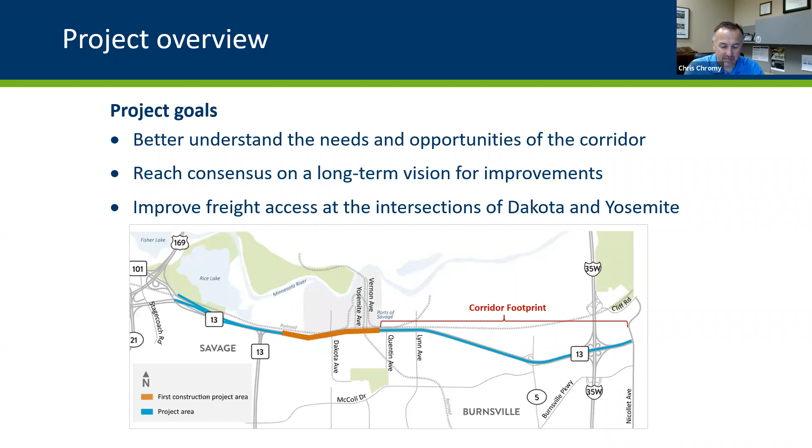I drove through this morning. The train was going through. The trucks were backed out onto Highway 13, as many of us see on a regular basis. So those are the goals of the study: to understand needs, reach a common vision for everyone to rally around, and then get some immediate improvements at the freight access locations.

So a little bit of background, Highway 13 is carrying more traffic than it was ever designed to. 56,000 cars a day go through downtown Savage on Highway 13. A typical 4-lane signalized roadway like that, we would expect to carry 40 to 45, maybe 50,000 cars a day. Through our study, we recognize that there are several intersections along the corridor that have more crashes than what we would expect for the amount of traffic going through there. And I'm sure you've all experienced the sirens you hear going to the crash sites on a fairly regular basis.

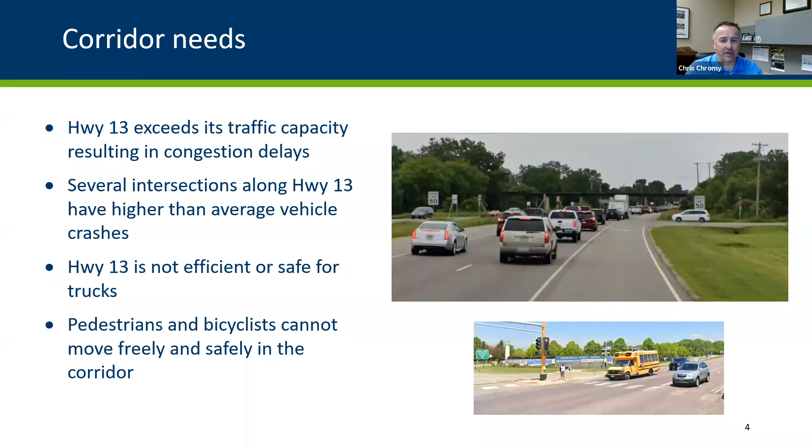We know that Highway 13 is not real efficient or safe for trucks. There's a lot of truck traffic going in and out of the ports, going in and out of waste management. There's a lot of retail and industrial in Savage. So it is certainly a high freight corridor, high large truck corridor. And then pedestrians and bicyclists, we do have a downtown area. There really isn't a connected bike ped facility along the corridor. There's plans for it, but we wanted to incorporate some of that into the vision.

We started the corridor study 2 years ago now, almost to the day, understanding the issues of the corridor. This corridor has been studied a number of times over the last 20 years, and it was our intent that this is going to be the last study. We're going to move projects forward.

We reached a consensus amongst the agencies on what the ultimate vision for Highway 13 looks like. And then we moved into our environmental review process and design for the corridor improvements, and I'll talk in a little bit more detail about that. As we move into the last quarter of 2021, we're now putting together construction documents for our first project that will begin in the spring of 2022 at Dakota Avenue.

That project is the first project out of the chute from the corridor study. There will be a number of projects coming on Highway 13 over the next, I'll say 5 to 15 to 20 years.

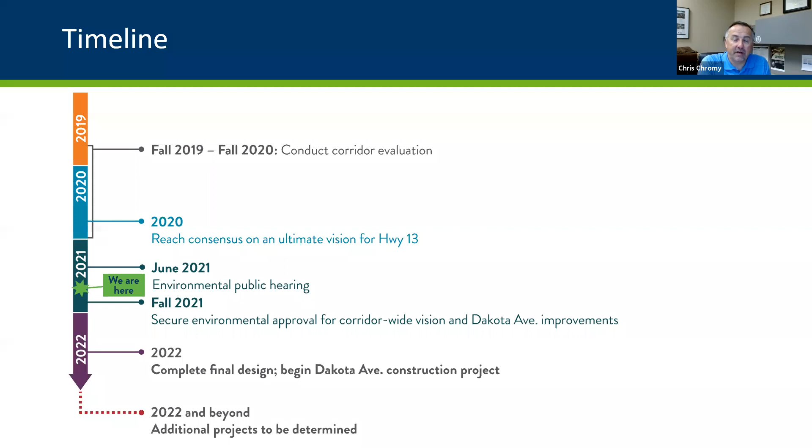So what is the corridor vision? What is the footprint? The corridor vision in my world is really our ability to agree upon where primary and secondary access along the corridor will occur, and then what types of intersection control are at those locations. As we plan corridors, we plan not just for the corridor itself, but how the corridor ties into the local roadway system, sidewalks and trails, and we design it to work as a system.

The footprint is a term that we use in the environmental review process. The footprint is the area which we believe will be disturbed to construct the recommended improvements, and any sensitive areas in there we will need to mitigate for. For this project, we are using a relatively new process with MnDOT and FHWA meant to streamline the environmental review process for future projects.

We used to do environmental reviews for every single project, and there was a lot of duplicate work, and we started at the beginning of the timeline each time. What we did on this corridor is we did an environmental assessment for the whole corridor, for the half dozen or dozen projects that could potentially come out of this corridor study.

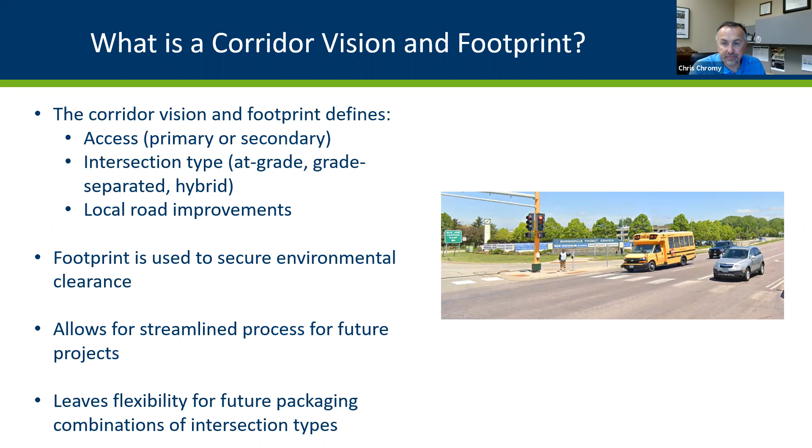So this is what the agreed upon vision for the corridor is, and I'll step through this a little bit. Of course, we have the relatively recent improvements at Highway 13 and 101. That project was built back in the 2011, 2012 timeframe. And then County Road 5; both of those have some grade separation. County Road 5 is a full interchange now.

The other primary intersections that we're going to maintain full access at are at Dakota Avenue, which is right at the ports of Savage; Quentin Avenue, which is on the west end of downtown Savage; Chowen Avenue, which is on the east end of downtown and on the Savage Burnsville border; and then Nicollet Avenue, just east of Highway 35.

We also built some flexibility to provide some secondary access at Lynn Avenue and Washburn Avenue. Both of those locations have traffic signals at them today, so all the movements are occurring there. At Lynn Avenue, because of the tightness of that corridor and some of the alternatives that we're looking at for Chowen and Quentin, we can't maintain full access there. So we're looking at how we build the local roadway system to the primary intersection so that safe and convenient access can still be provided.

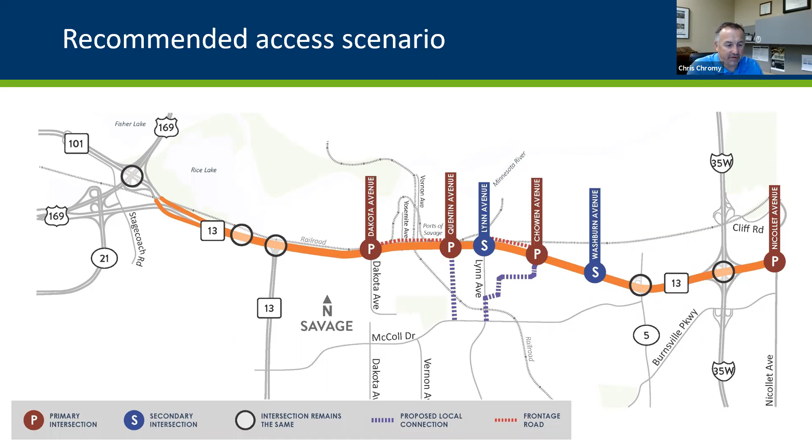So at grade improvements that could occur out here could include higher capacity at grade intersections. What you see here as an at grade, that would be a signalized RCUT. This is where we remove the crossing movement and the left turn out movement, but it creates a much more efficient intersection and we can still get access off of the highway and into businesses and into the local roadway system, and then connect people back to the highway, either through the local roadway system and to the primary intersections or through U-turns on the roadway itself.

A freeway type facility, I think we're all familiar with those. Those are relatively common. That's Interstate 35, it's 212, it's 169 through this area where we have grade separation or bridges to separate the conflicts on the roadway. And then we have a hybrid, which would be a mix of at grade and freeway type solutions, all within the flexibility of that corridor footprint.

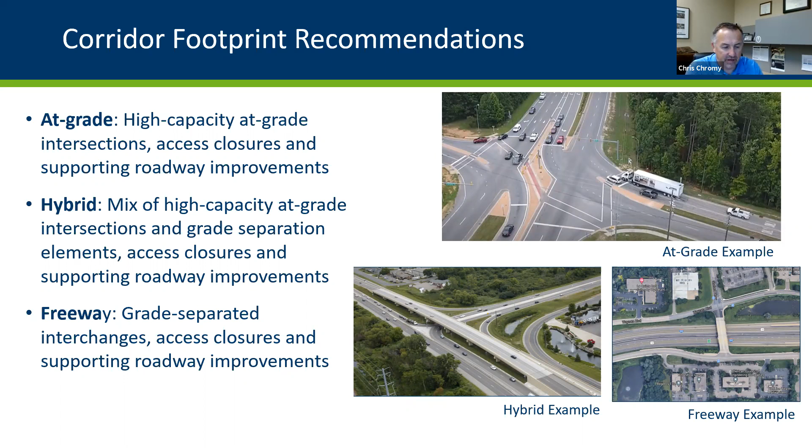So on the corridor concepts, we've had a number of public engagement feedback sessions. Going back all the way, actually, we had some of our initial stuff in February of 2020, just before COVID in person, and then through COVID in 2020, where we did some virtual stuff, and then some hybrid stuff here more recently. But some of the things that we heard from the public, business owners, property owners, those who chose to participate.

Between Quentin Avenue and Washburn, we did hear some support for hybrid options, at grade and grade separated type improvements, largely because it's the challenge of maintaining traffic flow and also providing safe and convenient access in a relatively tight area. There was clear recognition that there's issues with the traffic and safety, the congestion that's a regular thing on Highway 13, and then obvious concerns for loss or change in access to neighborhoods and businesses with the freeway options.

At Nicollet Avenue is a little bit different animal for us. The focus at Nicollet Avenue, what we heard is really the need for improvement for people walking, because this intersection is so important for transit, both MVTA and Metro Transit sites, kitty corner from one another there, and then the heart of the city and some of the dense land uses that are there demand improvements for people walking.

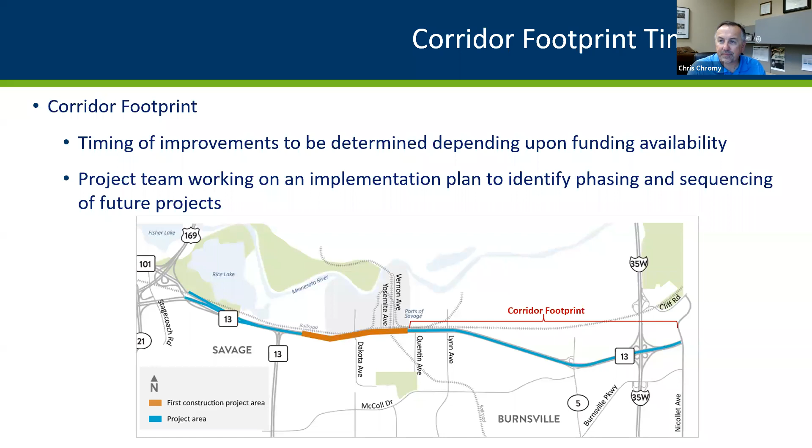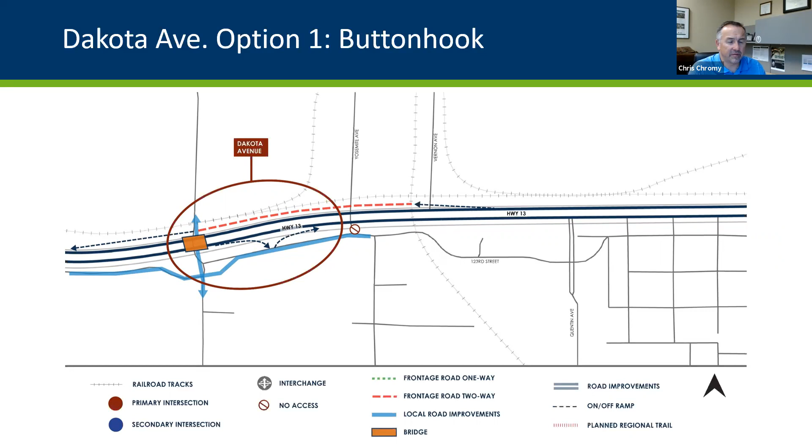So I'll talk a little bit about the Dakota Avenue improvements in Savage, and I'm going to go a little bit quicker here. We looked at and evaluated three viable options. One was this Buttonhook concept that included a bridge over Dakota Avenue, and then some quick on and offs to the frontage road system at that location. We looked at a tight diamond, which again brings Highway 13 up and over Dakota Avenue, so trucks and passenger vehicles would be able to go under Highway 13 between the ports and the area south of Highway 13.

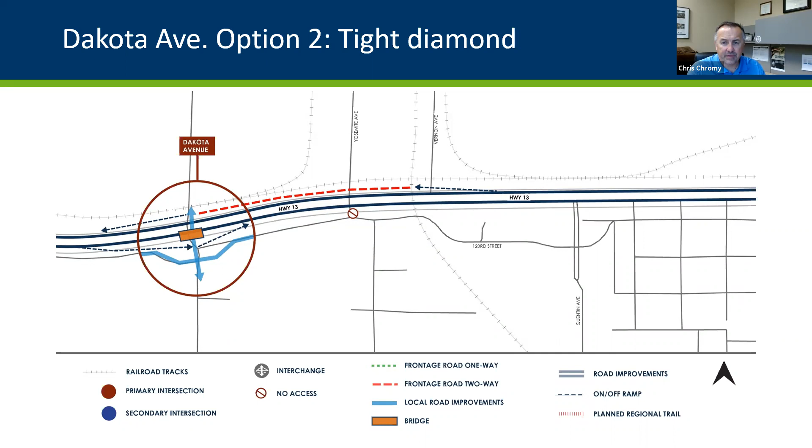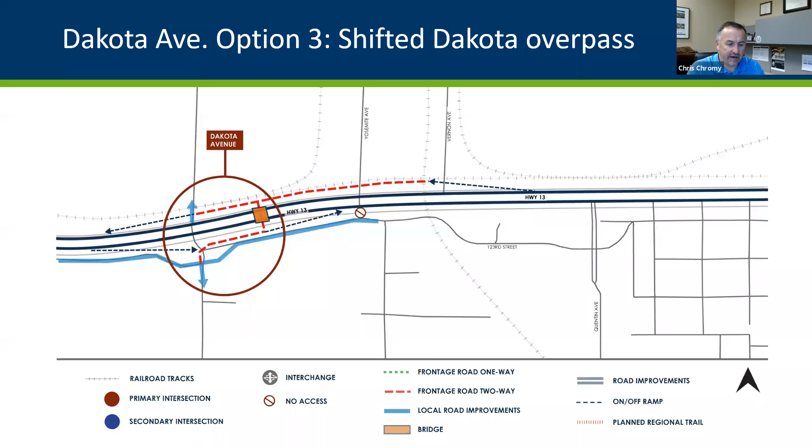And then we looked at a shifted Dakota overpass where we would have kept Highway 13 at grade and built a bridge halfway in between Yosemite and Dakota Avenue. A lot goes into the evaluation summary. One of those things is what we heard from the users of those intersections, and what we heard through the public engagement process last fall and into the spring is a lot of support for the grade separation options. The tight diamond seems to make the most sense and best serves the needs. Support for constructing new frontage roads with the design options.

Some concerns about some of the alternatives and how trucks and the large volume of trucks that come in and out of this area would navigate, as well as acceleration, deceleration items. Ultimately, that tight diamond, in addition to the public engagement and how we evaluated it for operations and safety, truck queuing, environmental impacts and ability to avoid impacts or minimize impacts.

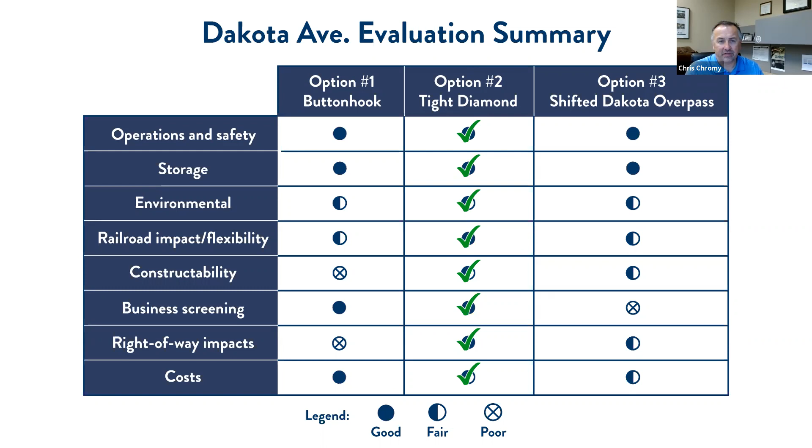The impact on the railroad was important, and how we were able to work with the railroad. Constructability, business screening, right-of-way impacts, and overall costs. There's rarely a perfect alternative. We basically have to find what best meets the needs of all these competing interests to get a project to move forward.

So it is the tight diamond that will be constructed next year, 22 and into the 23 timeframe. It includes elevating Highway 13 up and over Dakota Avenue. Dakota Avenue will be relatively at the same grade that it is today. For eastbound traffic, there will be a traditional exit ramp and entrance ramp back on right at Dakota Avenue. And we have to move the frontage road a little bit further to the south just to get it to all fit in. For westbound, it's a little bit different at exiting and entering.

After you leave Quentin Avenue, going west towards 101 and 169, there will be a slip ramp that goes over to Vernon Avenue just before the railroad trestle. Some of you may not even know Vernon Avenue is there. It's a relatively lightly used road used for dredging in the river mostly, but there is a public street there. So exit to Vernon, then we have a one-way frontage road that we will sneak under the railroad underpass or overpass that's there, over to Yosemite.

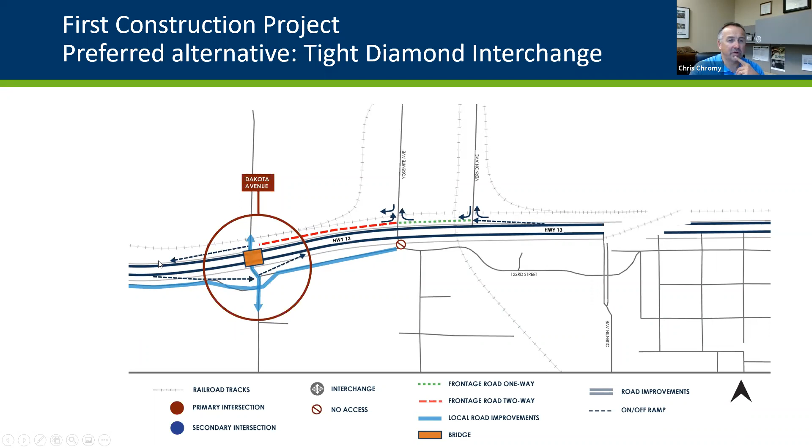At Yosemite Avenue, that frontage road becomes a two-lane or two-way frontage road, so that Yosemite traffic will be able to come over and use the Dakota Avenue as well. Traffic from Highway 13 can get all the way up over to Dakota, cross under Highway 13 at Dakota. And then to get back on comes a more traditional entrance ramp to go westbound Highway 13. So that project is going to get built starting next year.

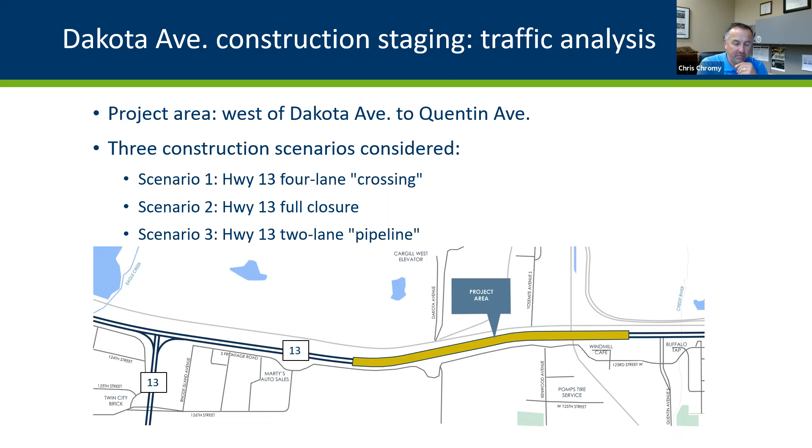And obviously the bigger impact is how do we get from point A to point B? How do we get to that diamond interchange? And we looked at a number of alternatives for staging of construction, the length of construction, impacts to traffic, impacts to the adjacent roadway system. We looked at 3 scenarios. And I'll talk briefly about each of these, but I will start by saying we're not closing Highway 13 for an entire construction season, but there will be some significant traffic impacts on Highway 13 for the bulk of the construction season next year.

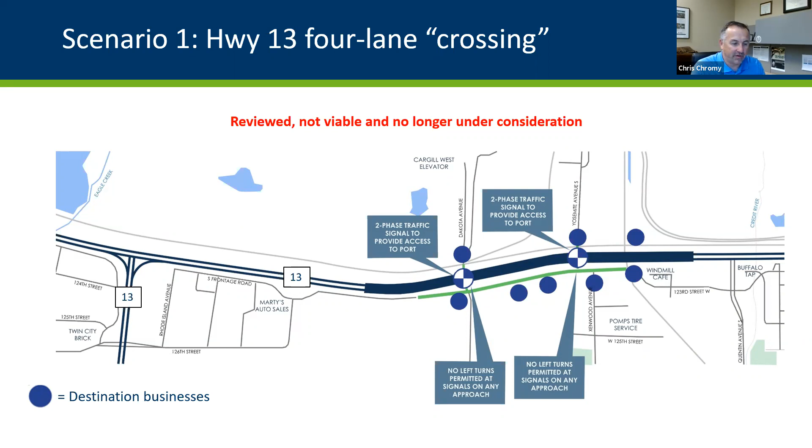So we looked at keeping 4 lanes of traffic open, 2 lanes in each direction. And then we looked at the potential for signalizing both Dakota and Yosemite. For construction, what we end up doing is we narrow lanes, we bring everything together to make room to construct something, and then we shift traffic onto the constructed area. Ultimately, we determined that this wasn't going to work. We couldn't get those traffic signals to function properly, along with the railroad crossings there. We had to dismiss this one, and this was our one alternative to keep 2 lanes of traffic in each direction open for the bulk of the construction season.

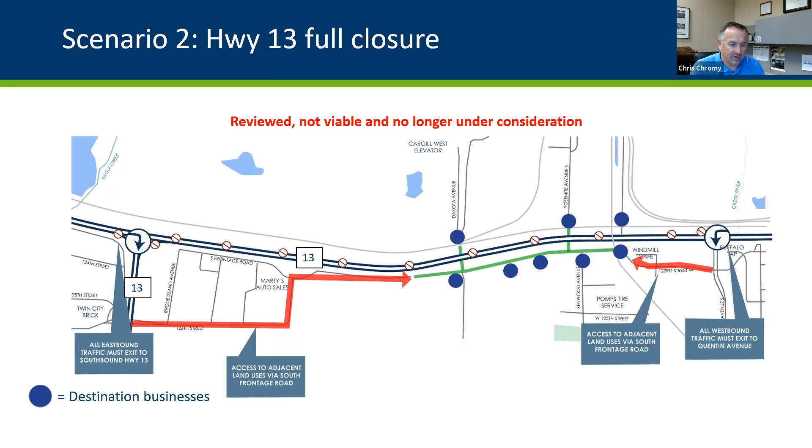We did look at a full closure. We do typically look at full closure of principal arterials like Highway 13, really as a means to expedite the construction. If we could get something constructed in 6 months rather than 12 months by closing it, when we have adjacent alternatives for traffic, we do consider that. We are not closing Highway 13 for the full season. Ultimately, the benefits that we would receive with quicker construction weren't there. We may have shaved a month or two off, but we would have had a lot more pain on the local system down on County Road 42, McColl Drive, and even up into the Bloomington area. So we're not closing the road for an extended period of time.

What we are doing and what we are moving forward with, and again, this is to prepare you starting for next year construction, is Highway 13 will be reduced down to a single lane in each direction. It'll be a 2-lane, what we call a pipeline option. Pipeline being we have limited or no conflicts within the construction zone itself. So there will be no left turns, there'll be no crossing movements on there. It's really meant to be the most efficient means of keeping that 1 lane of traffic moving. It will include changes in access to get in and out of the ports.

It will include changes in access to get in and out of the businesses along the freeway. The signal at Quentin Avenue will remain in operation for the duration. We will be accommodating U-turns for trucks going in and out of the ports. And then similarly, Highway 13 101, we're going to be doing some construction to provide for U-turns underneath the bridge so that traffic can get in and out of the businesses along this stretch.

And then we also will be making improvements to 126th Street here off of Highway 13 and over into the area. We are fortunate we have a good local frontage road on the south side to keep access, and we will keep that frontage road accessible through the duration of construction.

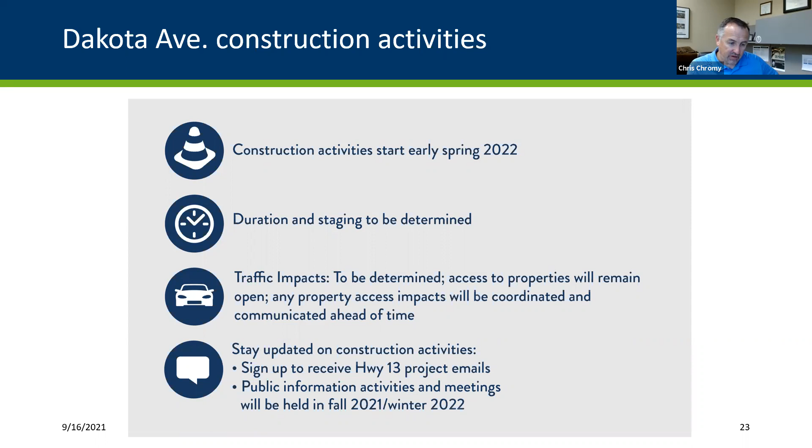So I'm going to shift back to the environmental assessment review. There was a question about what is environmental clearance, and I'll get into that here. So an environmental assessment is an environmental review process that is required by federal law. We do have federal funds that we'll be using in the corridor, and it's really a comprehensive review of all the protected items within the corridor and how the project is navigating them to avoid or minimize those impacts.

Our team is in the process of completing the environmental assessment for the whole corridor footprint and the first construction project. We had a public comment period on our environmental assessment from June 8th to July 8th, with the public hearing that was on Monday, June 28th. And that was both an in-person and virtual public hearing. And we expect the finding of no significant impact here later this month.